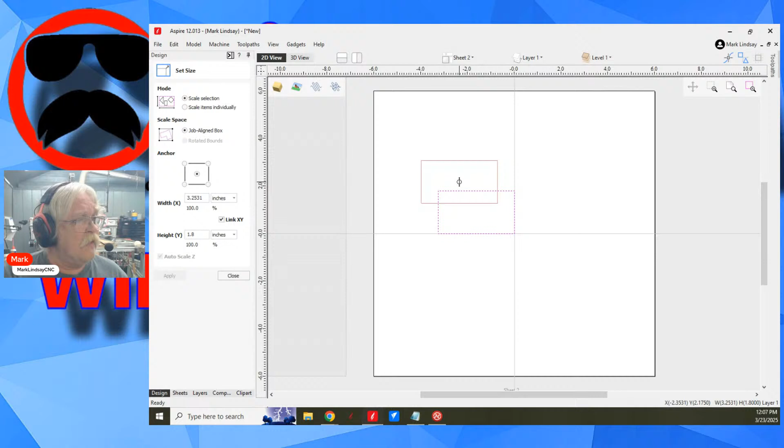In talking about set selected object size, let me bring this up here a little bit. When talking about the anchor point, the point that I was trying to make and just didn't spit it out and use these words was the fact that when you anchor from the center, your center point stays put. It doesn't move. So for instance, let me get rid of this here, and we'll create a bunch of half-inch circles. All right. And we got boom, boom, boom, boom, boom.

This is a pattern that you have to keep. Your measurements from center to center here are correct. Your measurements center to center here are correct. You need these holes, these circles, to stay in this position. But you need to make them smaller or larger for some reason. Maybe these are holes to receive a dowel, and you set it up for half-inch dowel, and later on you need to change it for 3/8 inch dowel. But you need these to stay in this location.

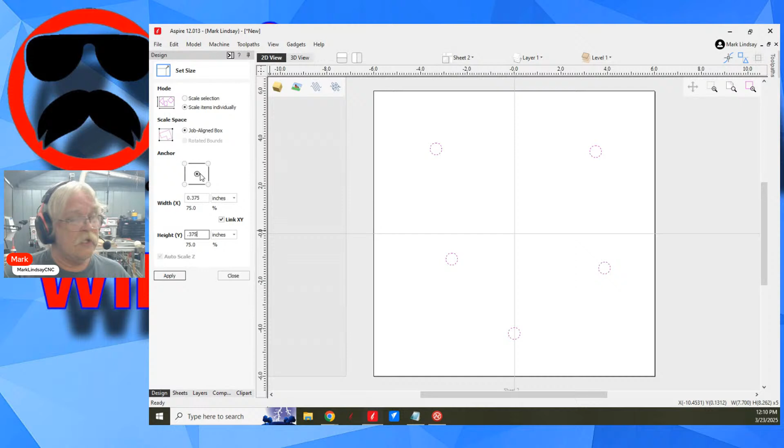For instance, I can change now my height in Y to 0.375, and my width in X changes. And because I have my anchor point set to the center, the location of these circles will not change, just the size. So I can click apply, and now I have the exact same pattern with the exact same locations, just a different size here.

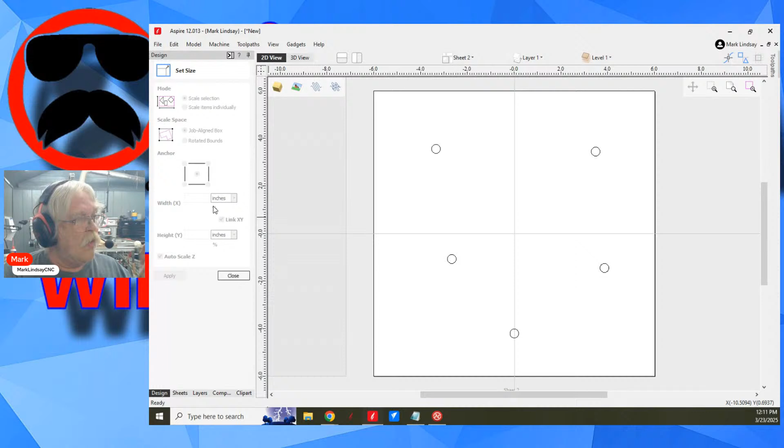This comes in real handy when you're working with some of these slot together puzzles where you have a tab that's going into, for instance, a 1/4 inch tall by 3/4 inch wide slot. And you go get some 1/8 inch plywood. You can now select all of those slots, and using set selected object size, you can anchor them in the center and change the height of those slots without changing their location. So I didn't mean to create a bunch of confusion in that.

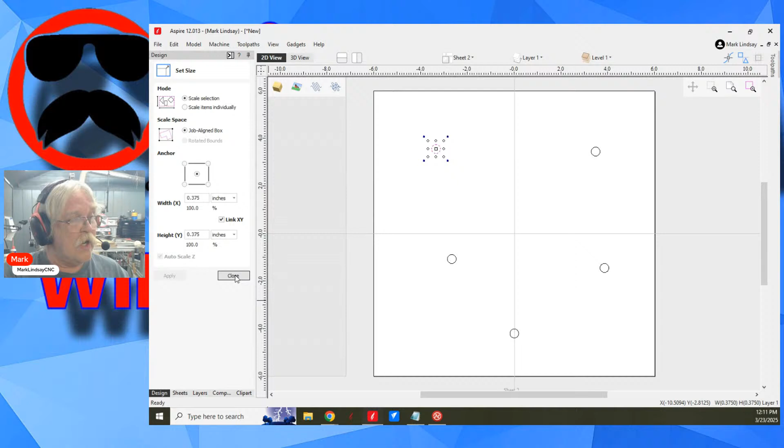Also, in set selected object size, we have down here the scale space. I was saving this for a future video. I could either go with a job aligned box or rotated bounds. I'm saving this explanation for a future video when we talk about rotating and mirroring vectors. Because if you look right now, I have all of these selected. Rotated bounds is grayed out. I can't even select that yet. I will get into this scale space when I get into rotating and mirroring vectors. Okay. That was an intentional oversight, let's just say.

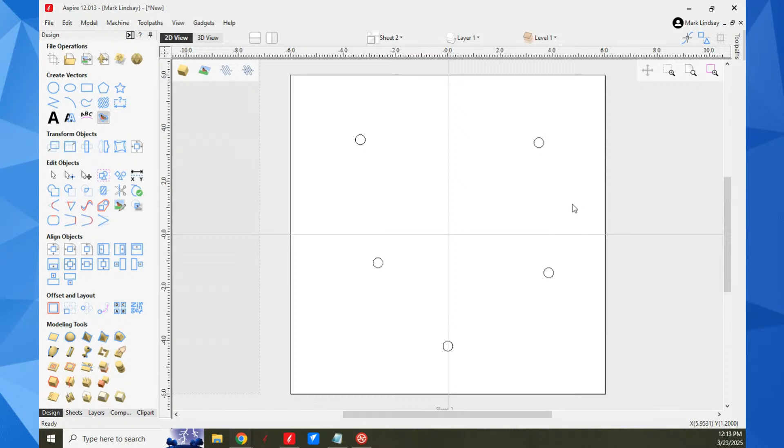There are a couple of things to look at here, Dion. Number one, let me go ahead and make this full screen, and I'll get rid of some other confusing things here. When you're doing your toolpath preview, if you go up here to toolpaths and come down here to preview simulation quality, normally I have mine set to standard out here when I'm broadcasting to you. That is simply because I've got a lot of stuff going on in the background here, and this uses so many resources that it can slow down everything. So I normally have this set on standard.

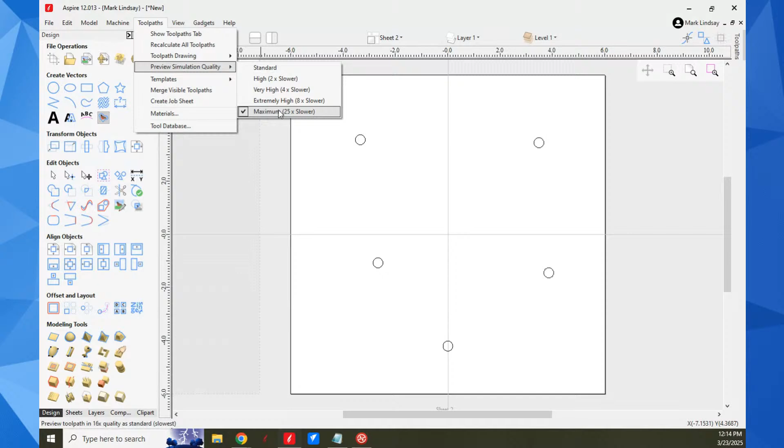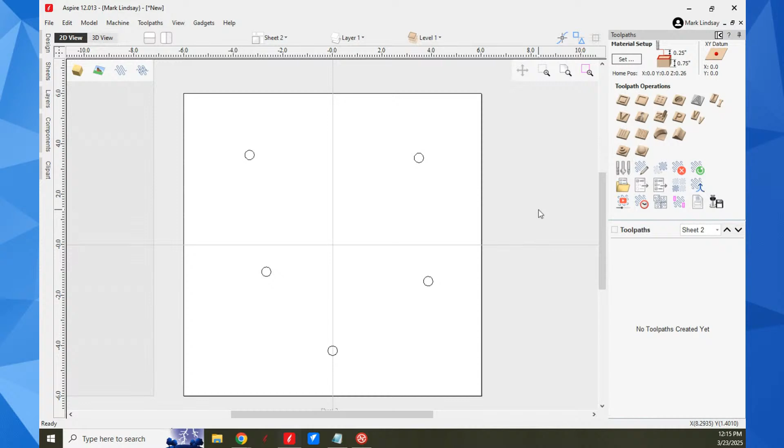But if you come down to preview simulation quality and set it, for instance, at the maximum, it will take longer to render and take longer for that preview to go through, but that will give you the highest quality of the previews. It is high resolution, but a lot of things also depend on your system.

If you have a robust video card in your system, that's going to help a lot because the GPU will process that faster. That GPU is dedicated to rendering that 3D preview. If you don't have a robust video card, get as much RAM in that computer as you can. What I'm getting at is it may be a limitation based on the resources that you have available in your computer.

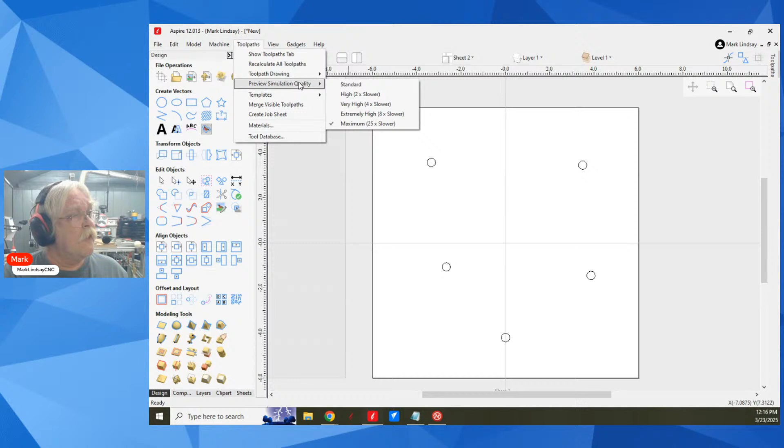So again, that is Toolpaths, preview simulation quality. Like I said, out here I normally use standard or high, but when I'm working in the house on something where I'm not using a lot of resources to broadcast and all this other good stuff, I will use the maximum, especially if I'm saving a preview image to send to a client or something like that.

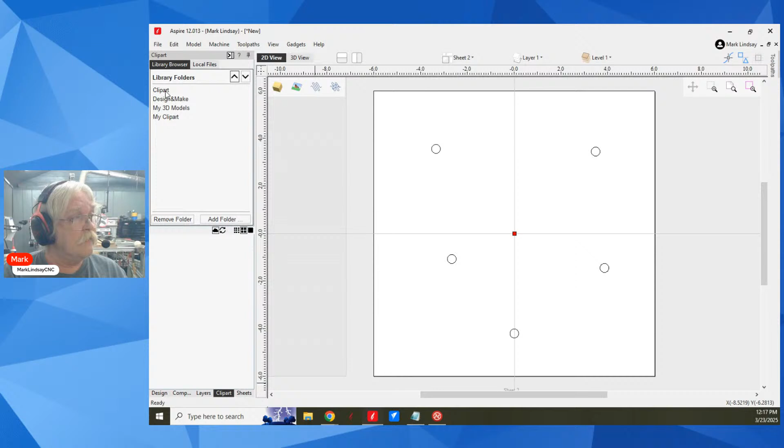Dion says, I was just setting job setup modeling resolution. Your method works much better. They work kind of hand in hand. But the difference is the modeling resolution over here in job setup has to do with how the 3D models are imported, if it's an STL file, for example, or rendered if you're using clip art. Let me go back over here to the design tab and go back into job setup. At standard resolution, it's kind of like a photo image, okay?

I've got a 12-inch wide, 12-inch tall piece of material here. At standard resolution, it's dividing this surface into 1 million points. But if I go to very high, it's dividing this up into 4 million points. So that right there is going to give you better detail and less blockiness on the actual model. And it does make a difference in the final product.

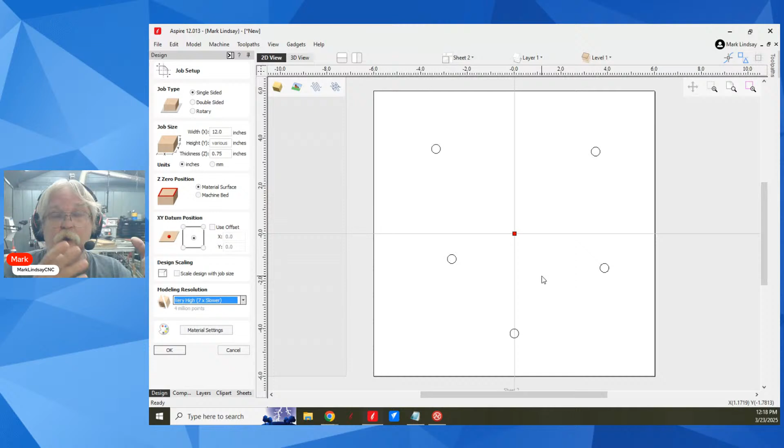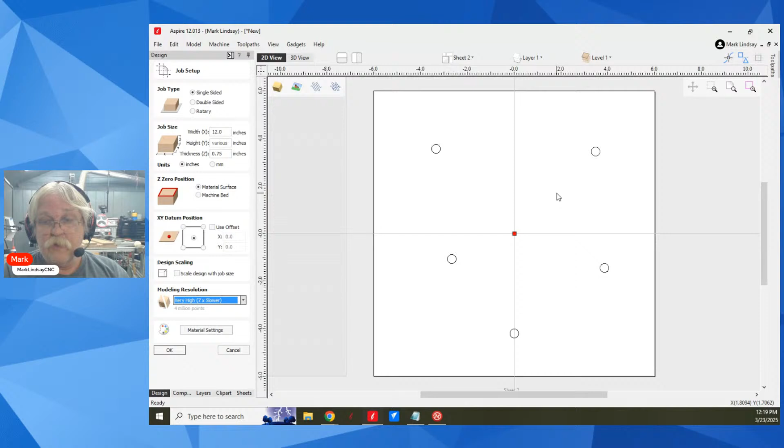That resolution does make a difference in the final product, because just like with a photo in imaging software, the more pixels you have for a size, the greater the detail. It's the same with this. Remember, the 3D models used in Vectric software are bitmap based. They use depth maps. So dividing that depth map of the 3D model, the smaller you can make those pixels, the more detail you're going to get. I hope that answers that, Dion.

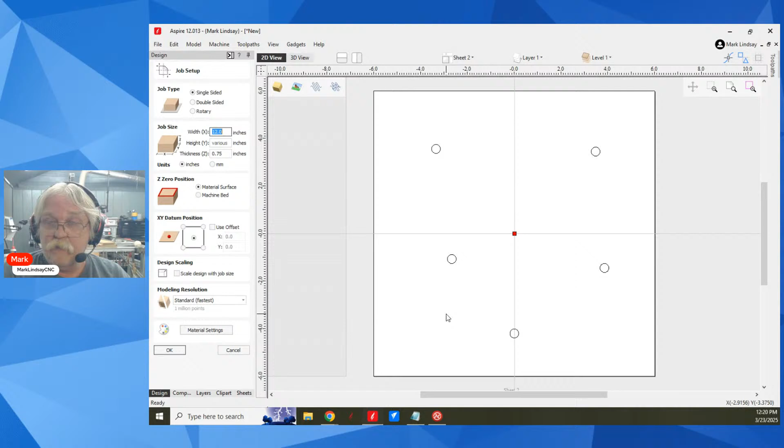Basically, Toolpaths, preview simulation quality. But again, they work hand in hand. If you import the 3D model at a low resolution, then try to capture a preview photo at high resolution, you're still going to have that low resolution model. And if you set this up at standard resolution and import a model, then come back and change the resolution, it will not change the resolution of that model. You'll have to get rid of it and re-import it at the higher resolution. Okay?

That model is going to stay at the resolution you set when you did your job setup. Now, you can set it up with standard resolution and then come back and change it later on to high resolution, as long as you do it before you import the first 3D content. Okay? So, I hope that helps.

All right, let's see here.

All right, let's get into another question here from David Zangmeister. David sent me an email about this, and I said, well, it's easier to talk about when I can show than it is to try to type out in text. So I told David I would talk about this, and thank you for joining us, David.

Is there a way to trick Vectric into cutting a groove in the side of a piece with an appropriate slot cutting bit? Yes, there is. But it's kind of sketchy. It's kind of dangerous, okay? Basically, what you'll want to do is, let me get set up over here, all right. Basically, what you'll want to do is, as you say, trick it into doing what you want to do.

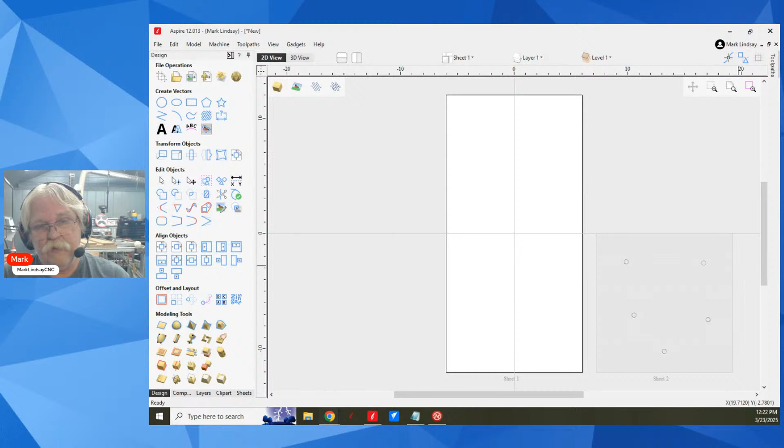So just straight up, don't try to use a bit with a guide bearing on it. You're asking for trouble. Now, most of these you can remove the guide bearing, but you're still going to have a little nub down there at the bottom that the guide bearing bolts to.

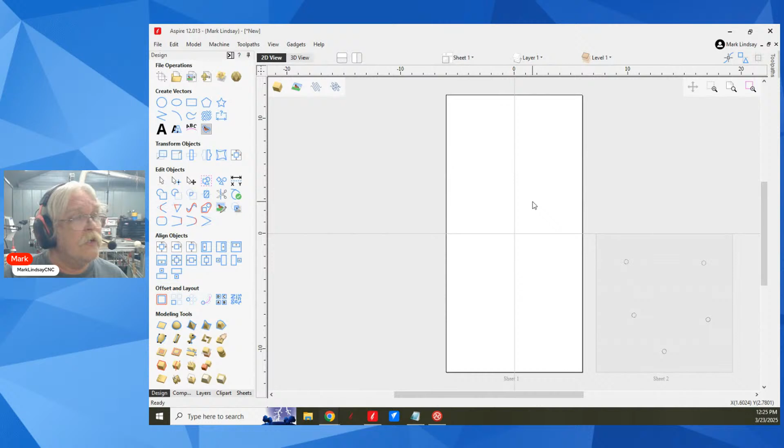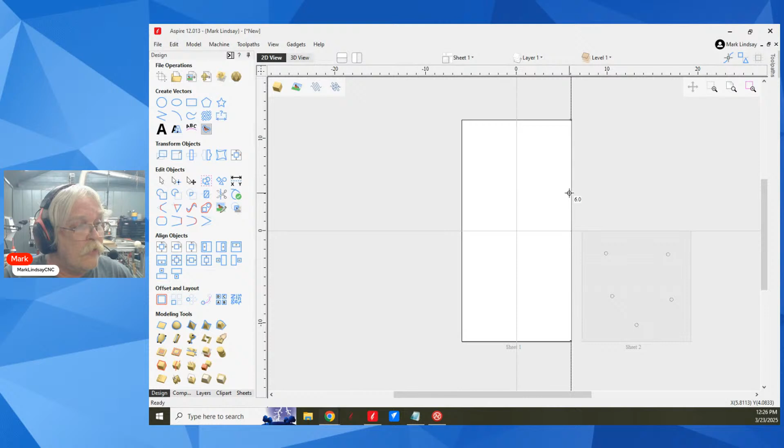What you're going to want to do is you need to draw a vector, obviously, for the bit to follow. So we also need to figure out where that vector is going to be placed. Now, this is kind of sort of cheating. I'm going to assume that this is the edge I want to put that vector on and that I want to cut.

Yeah, and I don't have a DXF viewer on this computer. This computer I have limited programs on because I don't use it for much out here.

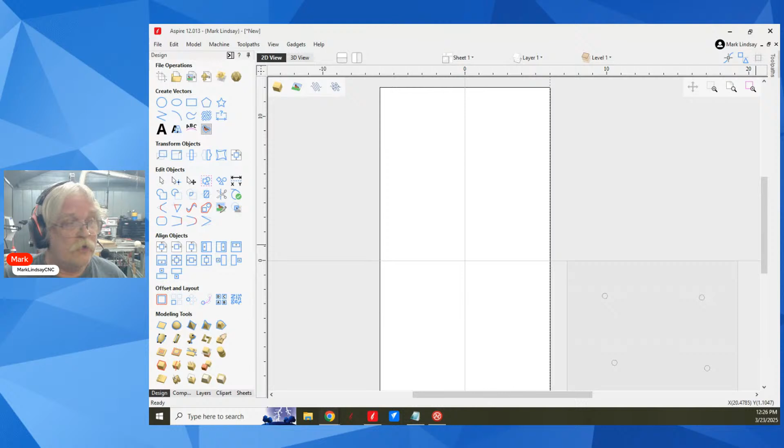So there's the edge that I want to cut the slot into. And I'm going to go 1/4 of an inch deep. I want that slot to be 1/4 of an inch in to the edge of the material. So I'm going to say minus 0.25 equals, and move that guide inward 1/4 of an inch. I'll close it. This is where I'm going to draw my vector.

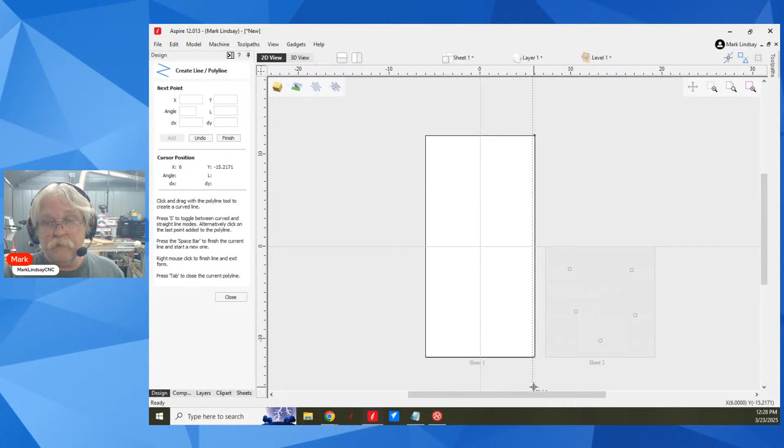So looking at that bit, I can see that the diameter is 1 1/8 inches. I'm going to double that because I want the bit to come down out here and out here. I want that bit to Z plunge off of the material, then come in, enter the material at the correct depth, come down here and cut all the way through and come out, then retract. Okay?

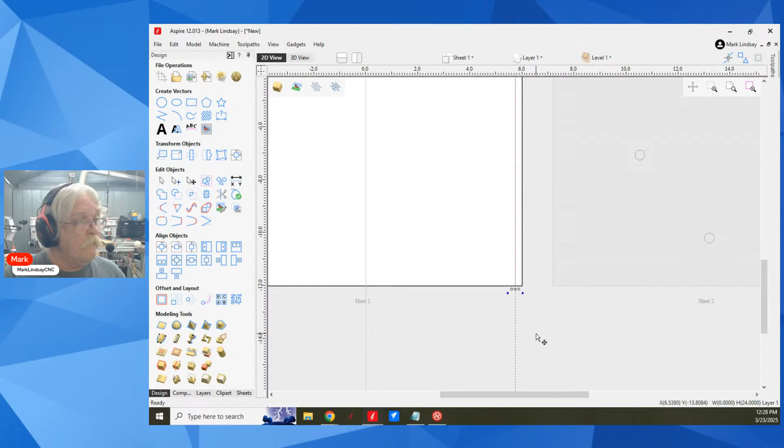So what I'm going to do is, I'm going to start about here. I'll just draw my vector here, then come down and shaboom. Close. Click off. Now I'm going to delete that guide.

Now, bet you didn't know it was going to dovetail in with what I showed yesterday. I'm going to scale this vector up. So I've got it selected. Come over to set selected object size. I'm going to scale the selection.

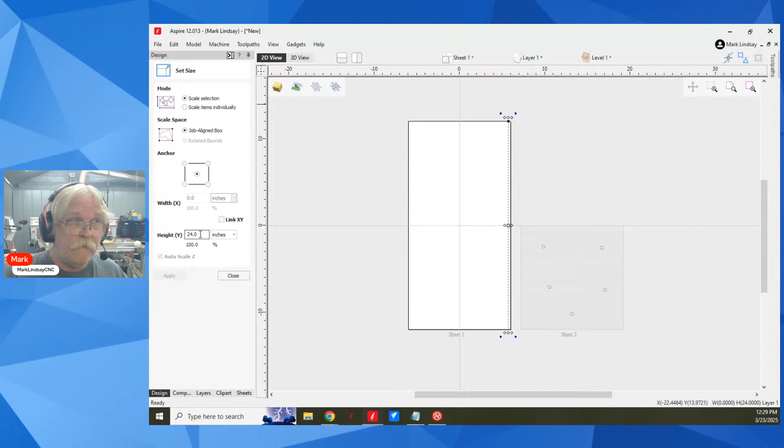I'm going to unlink the XY. My height is 24 inches. The bit is 1 1/8. Doubling that, it's 2 1/4. So I'm going to add 2 1/4 to this. Then I'm going to add another 1/2 inch. That way it misses this material by 1/4 of an inch in both directions.

So I want to add 2 3/4. So I'll just go plus 2.75 equals. So that's going to be the height in Y. I'm anchoring from the center. Click apply. And now my vector is...

Let's get a dimension here. Hello. Let's get a dimension here. See, this is what I mean. It's really slowing down my system because I have that rendering so high. Well, that's part of the reason. Come on, you can do it. I've got so many things going on this computer.

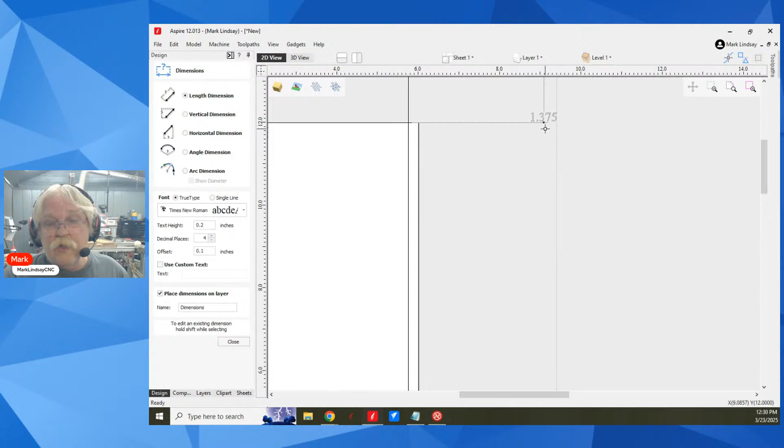There we go. I want a length dimension from here to here. I can pull that out 1 3/8 inches. So this bit is going to clear when it plunges down to my cut depth. It's going to do it out here. Okay. Well, I no longer need that dimension. We waited all day for me to do that.

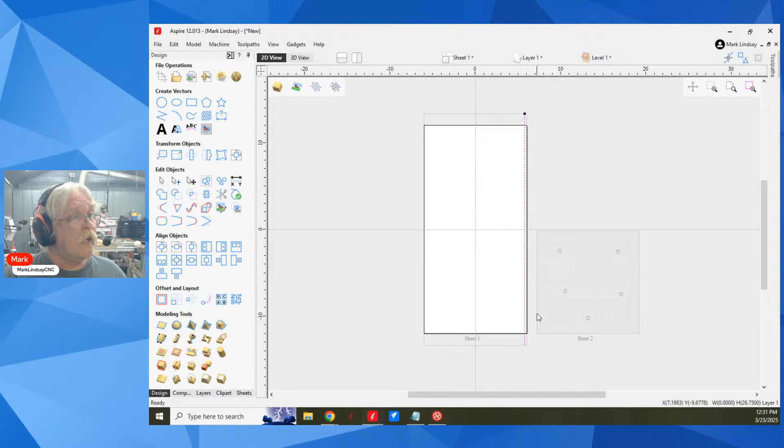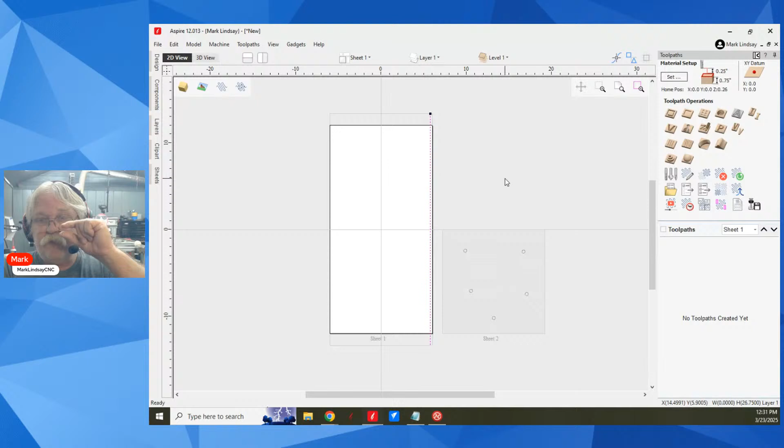All right. So now I can select that vector. I can come over here. Here's where it gets a little tricky. That bit is 5/16. That's the cutting height, 5/16 of an inch. Half of that is 5/32 of an inch. Sorry, metric folks, we're working in fractions.

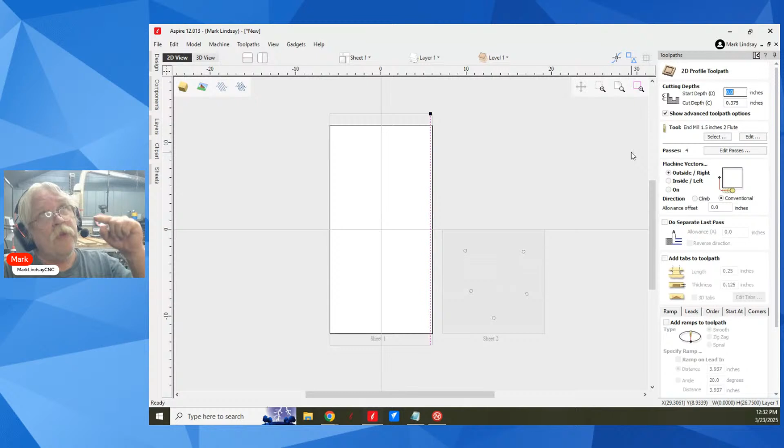We need to put the center of that bit in the center of this board. That's going to require a little bit of math. And they said there'd be no math. So what I'm going to do is I'm going to use a profile toolpath. So I want the bottom of that bit to be 5/32 below the center of my board.

Now my board is 3/4 of an inch thick. Half of that is 3/8 of an inch. I have to add 5/32 to that to get my cut depth. Okay. But it's not going to be my cut depth. It's going to be my start depth. My cut depth is going to be 0. My start depth is going to be, I don't know, the 5/32. I don't know what the heck that decimal equivalent is.

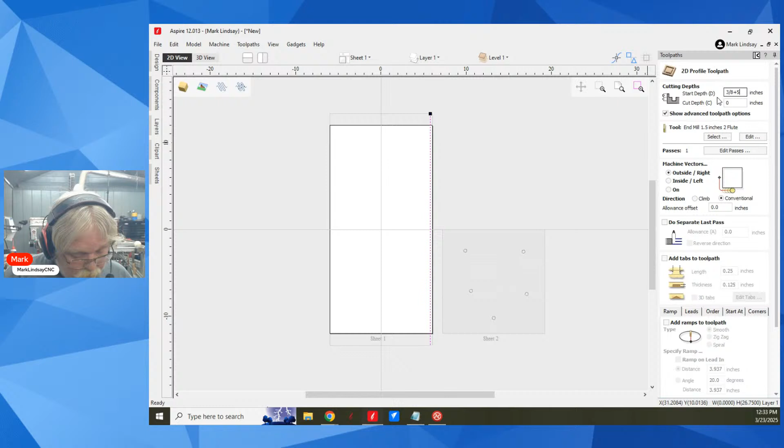But I do know 3/8 plus 5/32 equals, there's my start depth. That's my start depth. That's where the bottom edge of that bit is going to go. Okay.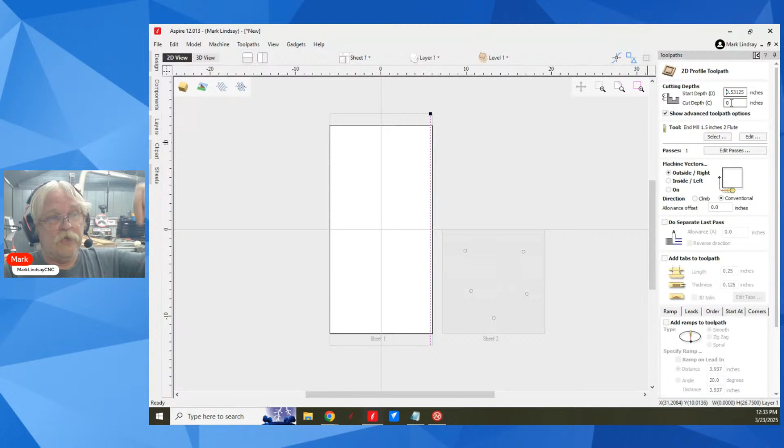Bear with me. I'm doing a cut depth of 0. Okay. It's going to plunge down to that depth and just move. It has to do it in a single pass. Now, here's where you may have a problem.

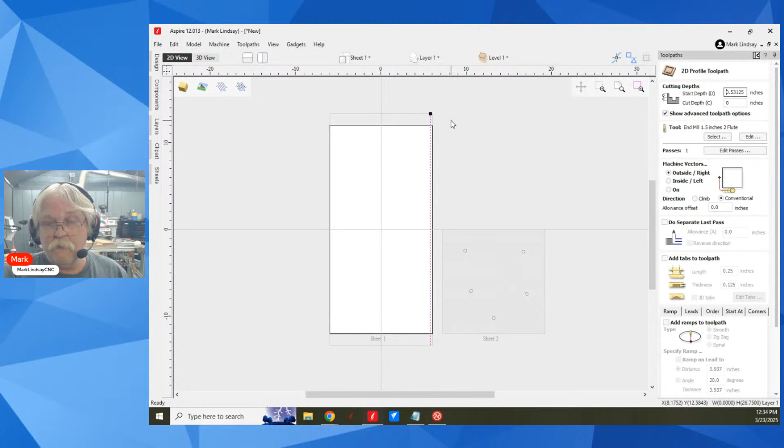If we look at this black dot, that tells me that's the start point. It's going to come up here and it's going to plunge. I want to machine to the inside of that vector. Again, when figuring out whether you're going to go outside to the right or inside to the left, imagine standing on that start point and looking in the direction of travel.

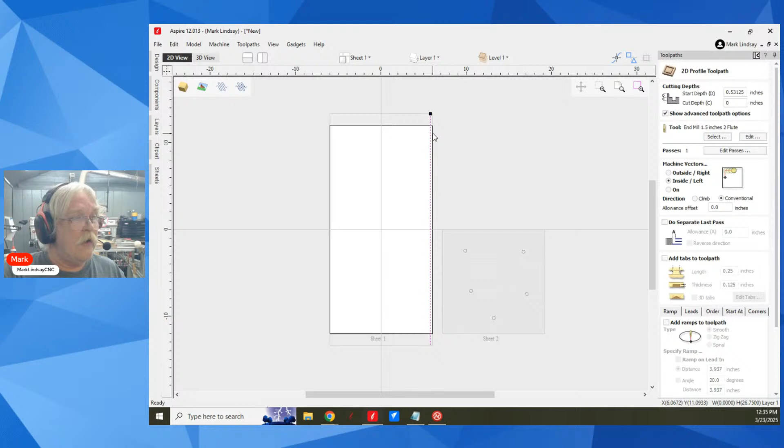If I go outside to the right, it's going to cut in. If I go inside to the left, the edge of that bit's going to follow that vector right there. Okay? And we're going to do this all in one pass. We're going to calculate it. Now, unfortunately, Vectric software will not calculate anything that gives us an undercut. So what it's going to look like is a rabbet cut into this material.

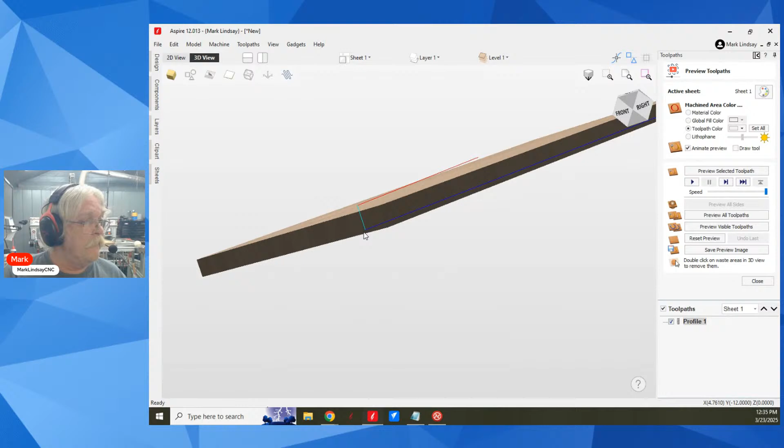But if we look at our toolpath, we see what it's doing. We've got a plunge here to the cutting depth. It's going to move this way, come out here, then lift up and go back to the start point. Take that back. It's switching up on me. It's going to come down here and then cut that way.

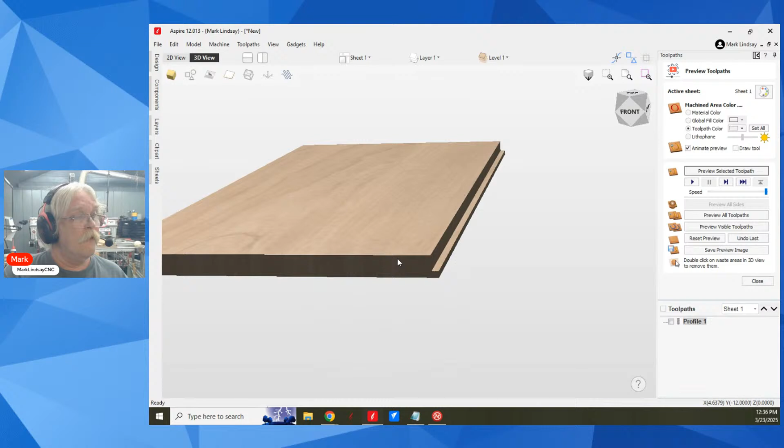This is why previews are really, really, really important. Now, again, it's just going to look like a 1/4 inch rabbet because it will not show an undercut. But that shows you what you're looking at. That's what your preview is going to look like. Okay?

It will not show this undercut, and there's nothing you can do to change that. Again, you have to kind of trick it into doing what you want it to do. And it's the same thing with the keyhole slot. I will try to go into that later.

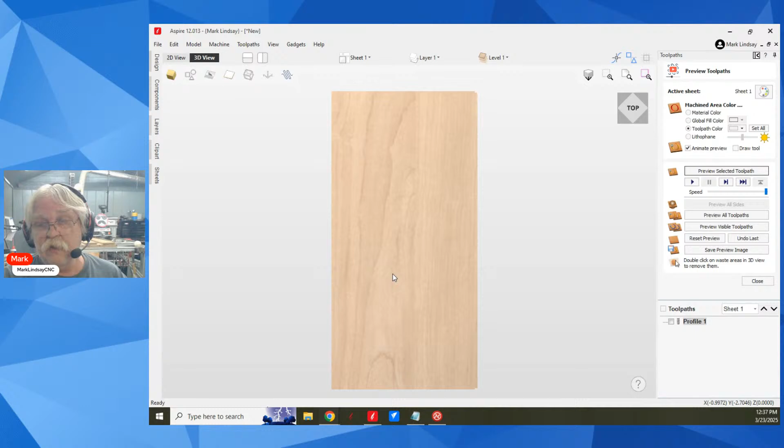We've got some other questions I want to get into, but cutting a keyhole is very, very similar. And in fact, that bit that you're using, David, is very similar to a keyhole bit. You've got to be mindful of the cutting height of your cutter and that blade along the shank as well, because it has a depth of cut as well.

simply because it's going to plunge in, move about maybe an inch. I think the longest keyhole I've ever cut has been a horizontal keyhole that was 2 inches. So it doesn't have to go fast. And in fact, it's better if it doesn't go fast.

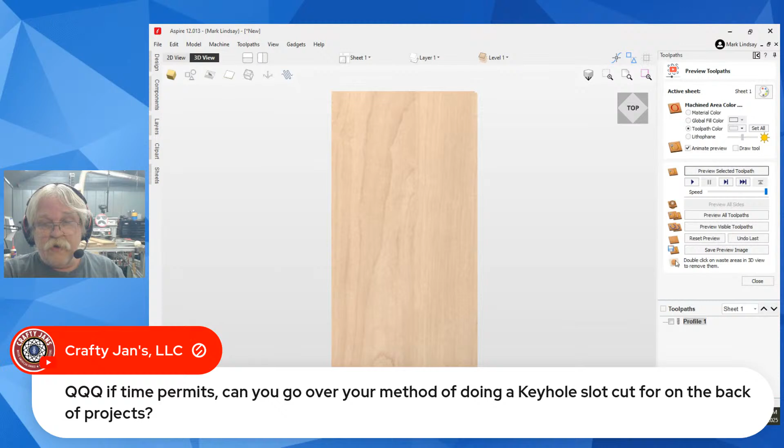All right. Jan was asking, can you go over your method of doing a keyhole slot cut for the back of projects? Very simple. I'll go ahead and do one here. Go back into the 2D view. What I do is I draw a rectangle, let's say right here. Oh, it's got that selected. That's why. I want to draw a rectangle, let's say right here. Okay.

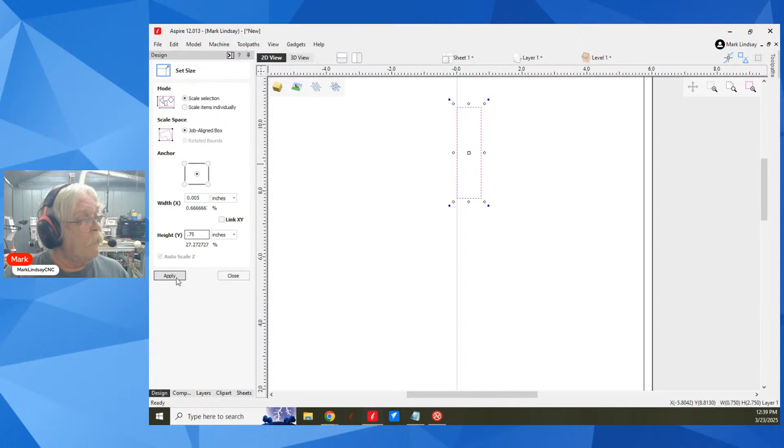Close. Now, this rectangle, I want it to be unlink XY. I want the rectangle to be 0.005. Whoops, more than one decimal. Software doesn't like that. And I want it to be 0.75. Very tiny. Apply. Close. Now I want to put that in the center of my material in X, so it's right on my 0 line.

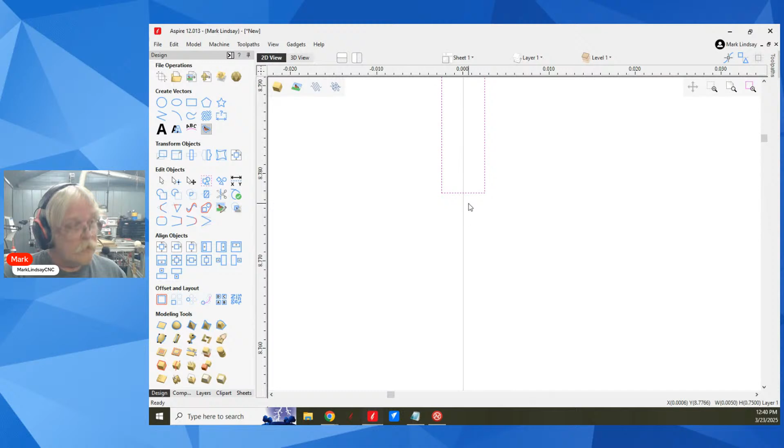Now I'm going to zoom in on this. With it selected, I'll go into node edit mode and I'm going to delete that span, so I have a horseshoe. Okay. Now I've got an open vector. That's what I'm going to use for my keyhole bit. I'm going to close that, do a profile. I'm going to select the bit. Going to use my keyhole bit.

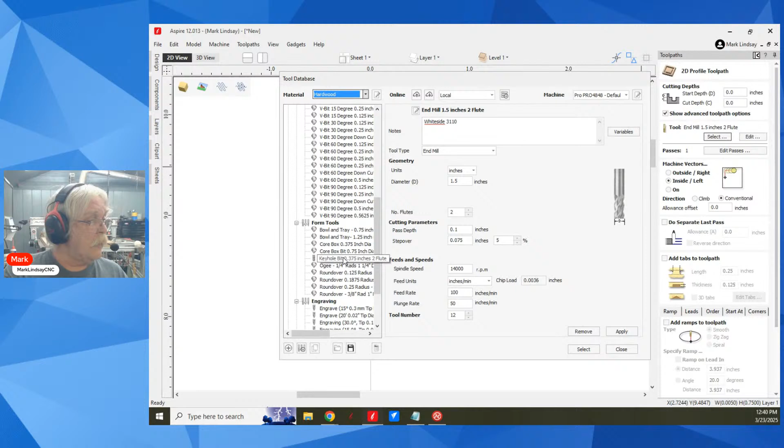And I'm going to look at that pass depth because that's what I'm going to use as a depth of cut. Okay. 0.3438. Select. 0.3438. And this is dependent on the bit you have. Every bit's going to be different. Okay. One pass, and I'm going to cut on the vector.

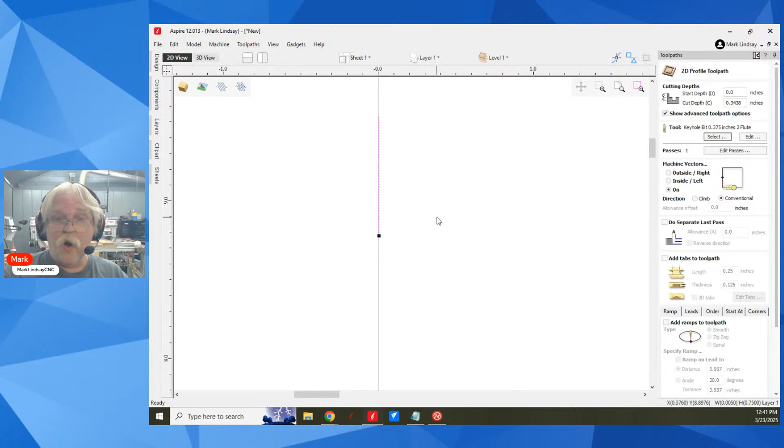So that keyhole bit's going to plunge right here to full depth. It's going to move up, come over 5/1000ths of an inch, come right back down here, then lift up out of that hole. It's going to be off by about 5/1000ths, but it will cut its way out. Okay. And of course, that's the only thing I'm going to do with it.

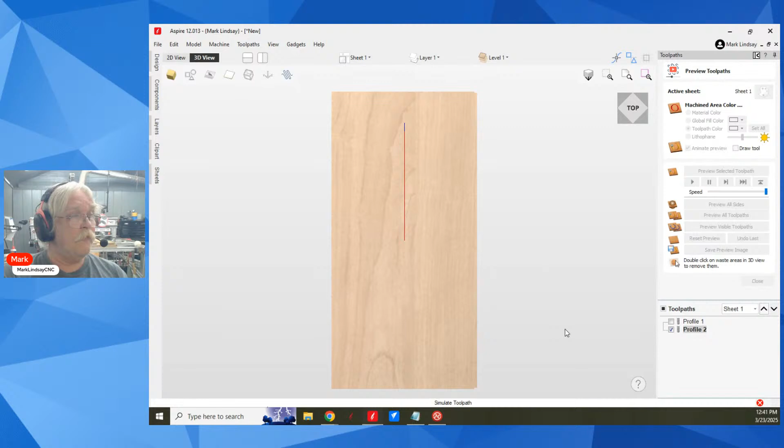And of course, it will not preview an undercut, which is what that keyhole bit creates. So when I preview it, it's just going to look like a slot, but that is actually going to be a keyhole. So that's how I do the keyholes, Kurt. And again, it's totally dependent on which keyhole bit you have. So you've got to measure everything and take all of that into account.

Now, and typically, yes, typically at a lower speed. And that's simply because of the depth of cut. You don't want to stress that bit, because you can really damage either the project or the machine if you get this wrong.

So now Michael Ludwig says the keyhole gadget works very well also. I've never used the keyhole gadget. Do you ever have problems with chips using the keyhole bit? No, but I have good dust collection. So generally speaking, the chips are gone by the time it comes back. But that's why I have it do that little horseshoe shape. It's only 5/1000ths wide.

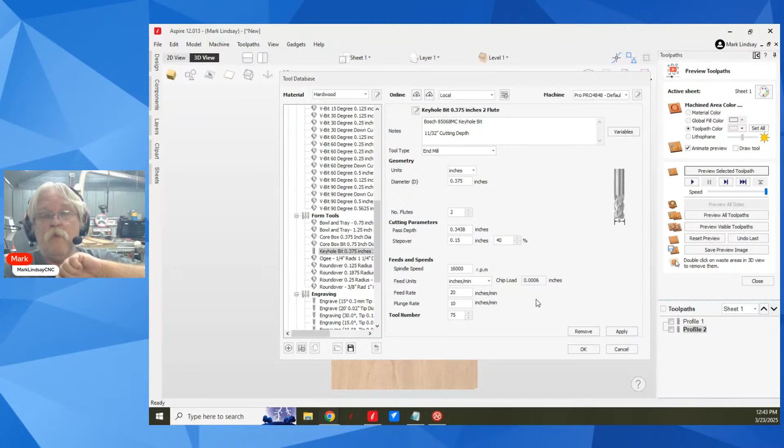And you can reduce that if you want to make it 2/1000ths or 3/1000ths or what have you, but 5/1000ths works for me. And it's just moving over just slightly. So what you've got to get that bit to do, it's got to plunge in, move up, and then come back. If you try to overlap two vectors, it's going to try to lift up before coming out, and you don't want it to try to lift up out of that keyhole.

So it's got to plunge in, move up, move over just slightly, and then cut its way back, then lift out at the same point that it plunged in. And that's the whole point of doing that very slight U. It'll cut its way there and back and not try to force its way out.

And your first pass is at full bit width and depth. Yes. And that's why I run it slow, is give it time to cut instead of trying to force it.

The gadget just needs a hole drawn and does everything itself. What I did with this, and this is the only G code I saved, I created a vertical 1-inch tall keyhole and a horizontal 1.5 inch wide keyhole, and set my XY 0 to the center. I save those 2 pieces of G code. Then the next time I need to make a keyhole, I mark on the material where I want that keyhole to be, and then I set my XY 0 at that point, run the keyhole, and I'm done. But I can load either one of those G codes and just run it.

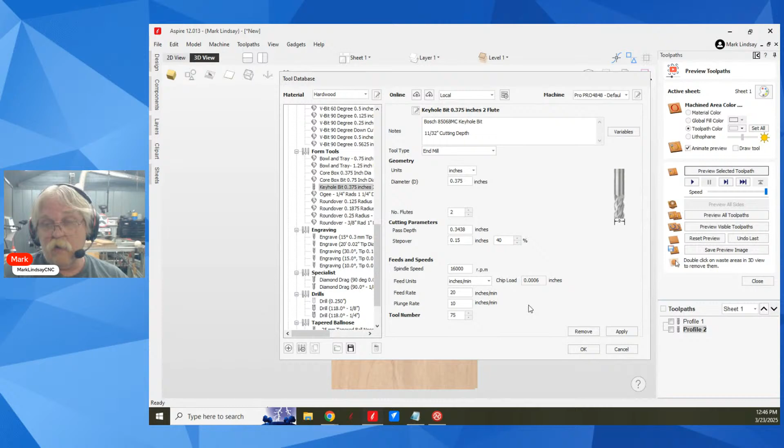I made a video on how to enter a keyhole bit and how to use the keyhole bit in, I want to say it was VCarve. I don't think I had Aspire yet. And I will link that video down in the description of this live stream as soon as we're finished here. Just wrote myself a note. I want to say it was part 12 of my original Absolute Beginner series. And if that's the case, I'll go ahead and make it part 12 of the 12 plus Absolute Beginner series. I'll redo that bit. So let's see here.

As far as the gadget is concerned, Michael, the main reason I didn't use the gadget was because I was VCarve desktop and Cut 2D desktop. They don't have gadget support. They can't use gadgets. So I was trying to come up with a way all users could make a keyhole without relying on gadgets.

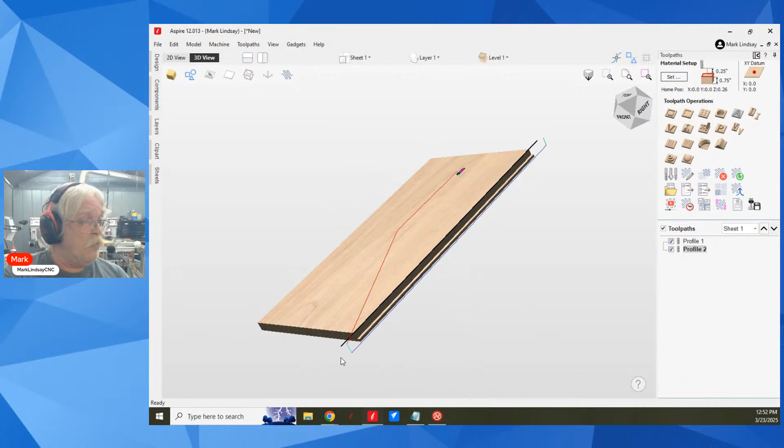So will a bit not run along back and forth on a single line? No, and that's the problem, Alan. It will want to plunge in just like this over here. This is a single line. It will want to plunge in, move down the length of that line, then come out and go back to XY0. It will not come back on that line. So that's why you trick the system. You trick it into doing that.

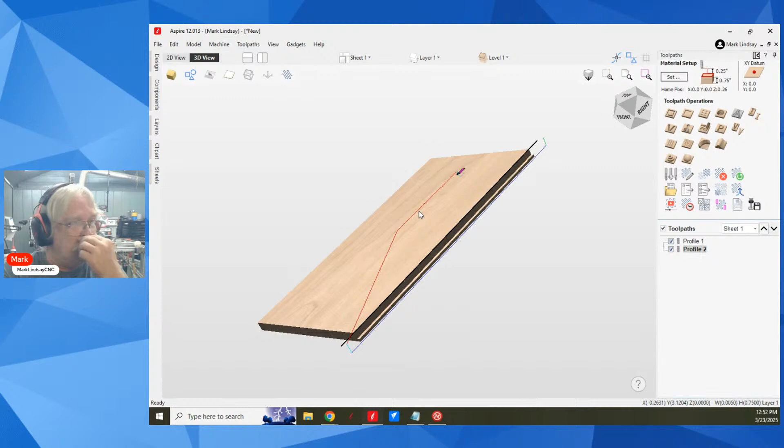Just make it a little horseshoe, so it'll follow that entire horseshoe. And that's why that horseshoe is so narrow. I mean, in this example, this is 5/1000ths of an inch wide.

That is, let's figure it out - that is 0.127 millimeters. That's an eighth of a millimeter. So that's a tiny, tiny horseshoe.

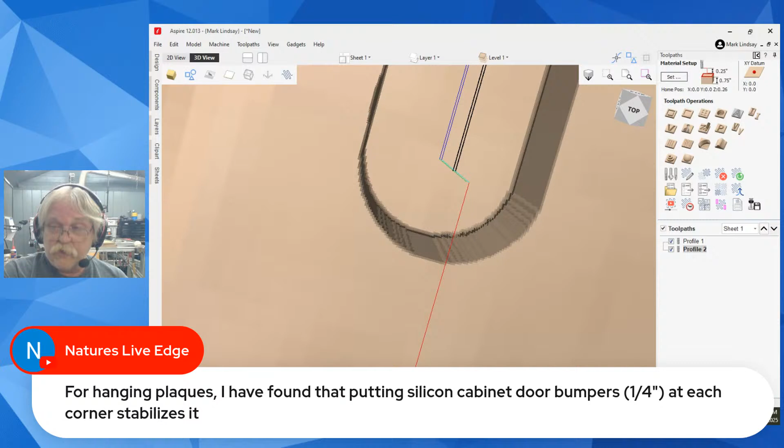For hanging plaques, I have found that putting silicone cabinet door bumpers, 1/4 inch diameter, at each corner helps stabilize it. Felt pads as well - little silicone ones or the little felt ones, they both help a lot. I've seen people even cover the entire back of a plaque with felt for much the same reason. That gives more grip, especially on a textured wall.

So let's get into some of these other questions here. Alan Williamson says, I need to start learning about 3D. Do you have a series for 3D for beginners? Yes, thank you for asking.

However, it's the older versions - all of the methods are the same, but the interfaces have changed. That's going to be next on my list, to do 3D for absolute beginners in version 12. But the methods are the same. I'll link it - actually, there was already a link. You should see a link to 3D for the Absolute Beginner already down in the description. You'll have to scroll down a little bit, but it should be there. If it isn't, I will put it there - the 3D playlist. But I believe it's there already.

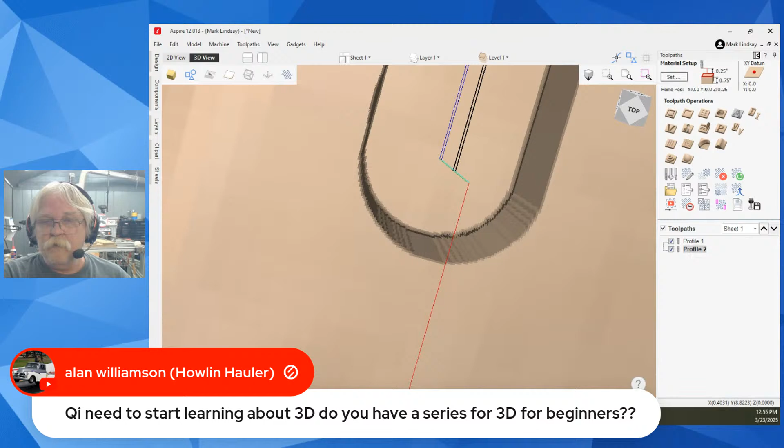So let's see here. Rich Bratcher wants to know, what was the worst thing that happened when upgrading to version 12?

Just not being used to the interface - that was the worst thing. Because you got to remember, for instance, this wasn't here in version 11.5 and earlier. Wasn't here at all. Everything looked different, the colors were different. Everything was different, completely different.

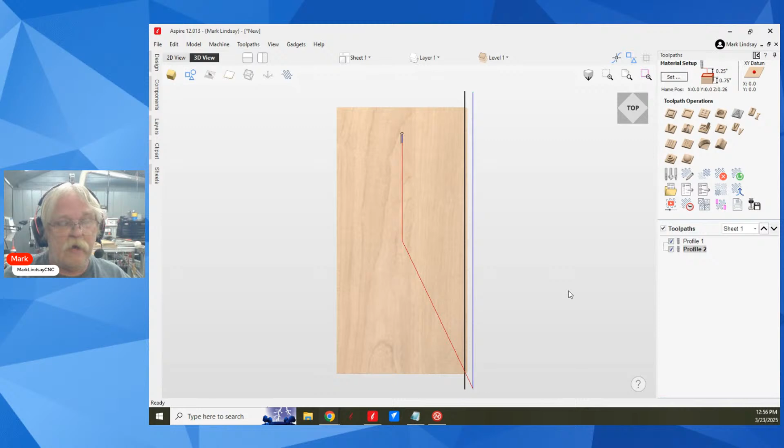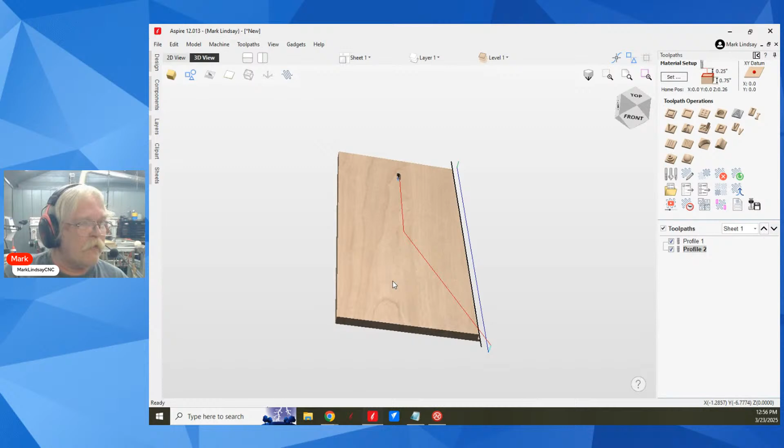The one thing that really bugged me, and it still catches me all the time, is in the 3D view, whether you're previewing or not, they went from left clicking to move this around to right clicking. And I still want to left click and move this, so you see me drawing squares. I still want to left click to wiggle this around, and that's not how you do it.

But I have heard from folks, especially those who are colorblind, that they have a real hard time with this layout, with the colors and the sizes of some of these icons. They really tried to put drawing and modeling on the same page, on the same tab rather. I prefer having a separate modeling tab with all my modeling tools over there.

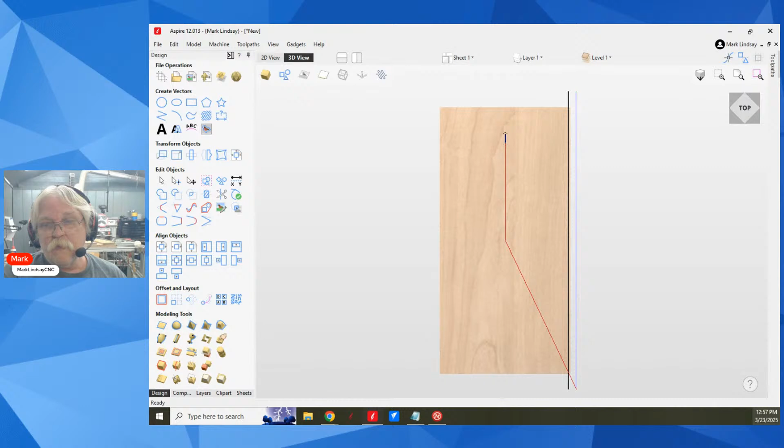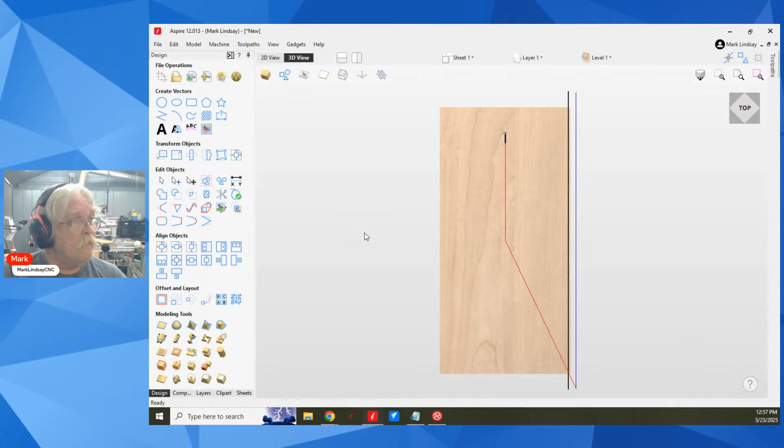So, I guess that was probably it. Everything else I more or less liked. It took some getting used to - it took some getting used to learn that I could draw in the 3D view. That was new and cool. But I picked up on it pretty well.

If I had to pick it, I'd say the worst thing about it was switching from left click to right click to move around my 3D view. Other than that, people ask me all the time, do you think it's worth the upgrade? Yeah, it's worth the upgrade. I didn't think it would be, but I enjoyed it. I do enjoy it.

Now, we were talking about this before we went live. If I go back to do something in 11.5, if somebody who doesn't have version 12 sends me a file and I have to look at it, maybe do a little modification, and I want to send that back to them, I have to do it in 11.5. I get lost in 11.5. I don't remember where things are. I don't remember the icons because I've gotten so used to these.

Let's see here. Any issues with the tool database coming over? No, because when you... let's see, I think it's up here. Tool data, no, wasn't this. Where was it?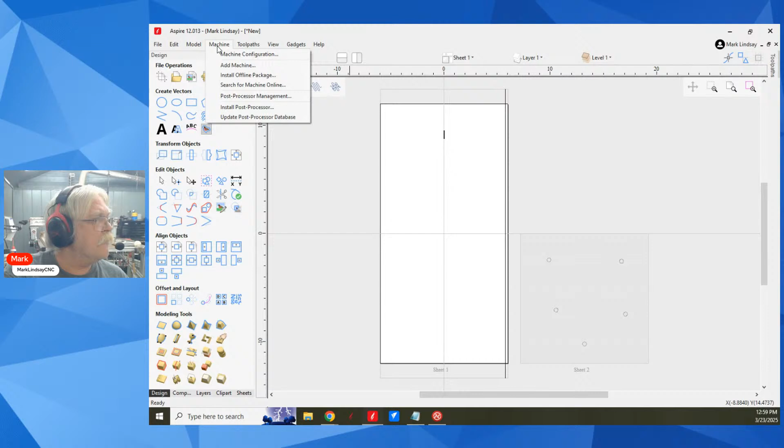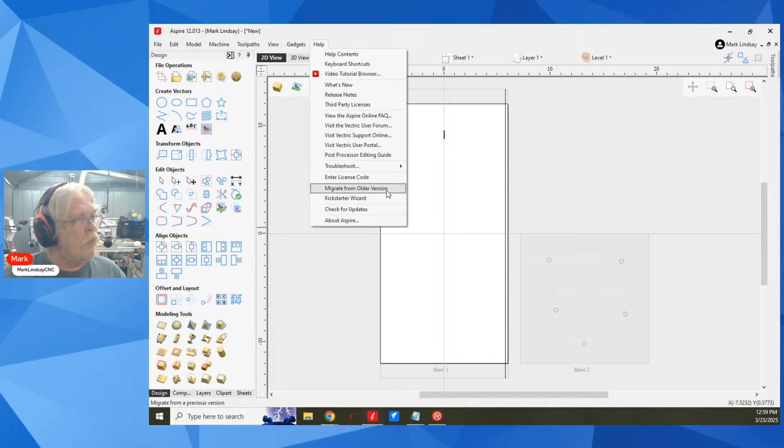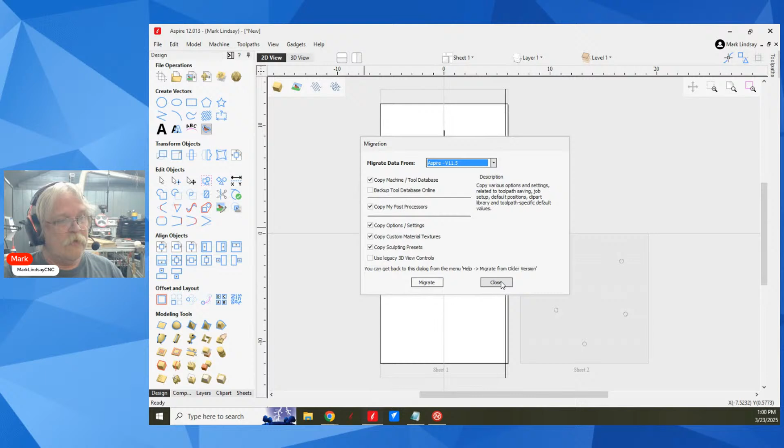There is a way to merge or migrate from a previous edition. Maybe it's over here. Migrate from an older version. Just migrate. When you go into here, you can migrate data from version 11.5, and here's where you get copy the machine and tool database, back it up online, copy the post processors, all of that stuff, and it'll take all of the settings from, in this case 11.5, and bring it over here so you virtually have the same setup. Normally when you install a new version it will immediately send you into that. Sometimes it doesn't. But if you go up to... where did I find that? Under help, migrate from older version. And that really helps eliminate a lot of those problems.

Okay, let's see, we've got a couple more questions here. I hope that answered that, Rich.

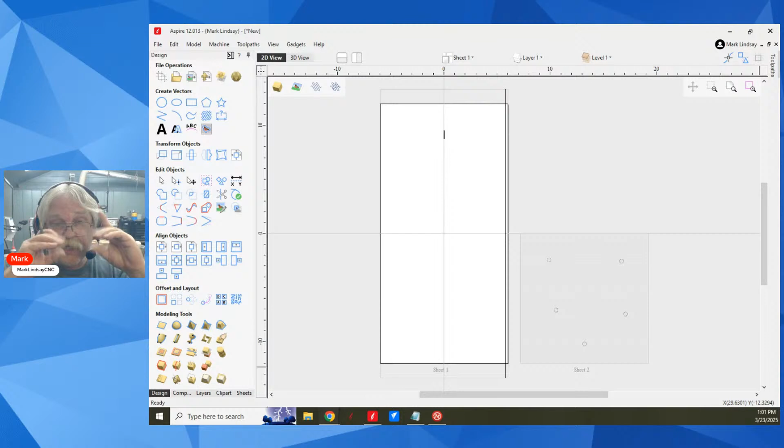Sam Spade says a project was designed with 6mm plywood. How do you change your project when your material is 4.5? There are tabs and notches that need to be changed. What I'm going to do, Sam, is go find a Vectric video where they explained it—it was Becky that did the video. They explained the ability to adjust and rescale sizes individually, and she did that exact example. She resized the slots as well as the tabs to fit those slots. She did both, just like you're asking. So I'm going to defer to her video.

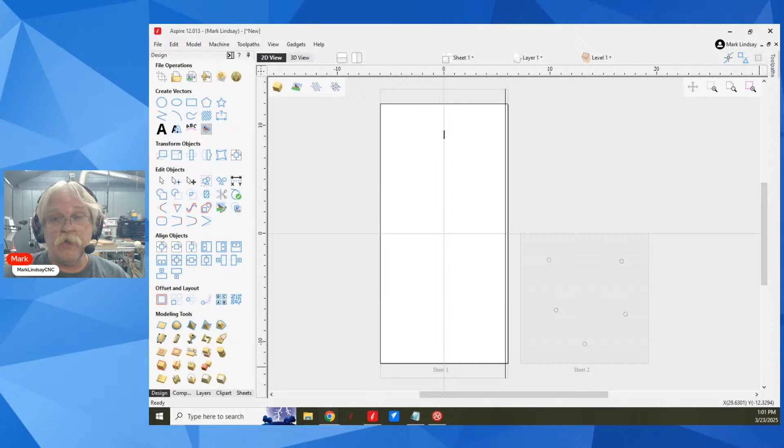Tab and slot. So I will find that video and link it in the description here just as soon as we're finished, okay? That's simply because there are several steps involved and I don't right off the top of my head recall all of them. But it was fairly simple to do. One word of advice, if you do that, after you've done the conversion, save as and give it a slightly different name. That way you have both, one with 6mm, one with 4.5mm, so you're not eliminating one or the other. But I will go find it. I don't remember the title of it, but I'll go find it and link it in the description as soon as we're finished here. Give me about 15 minutes after we're done live here.

So, let's see, John Thompson says, can you show how to make a fillet inward? Okay, let me see if I've got this correct.

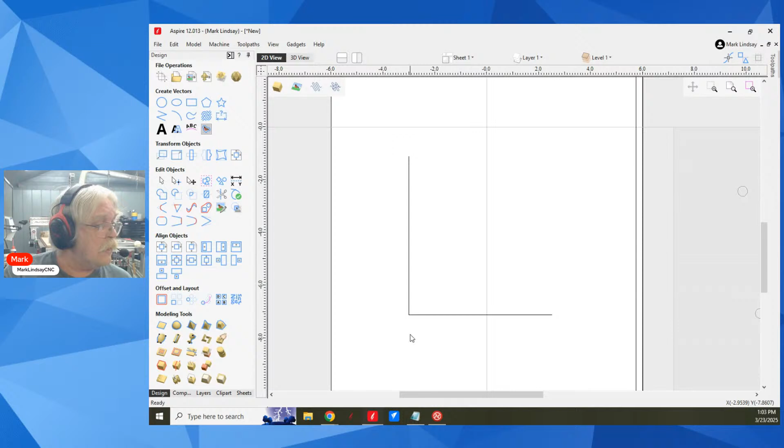I'll go over here and draw a line, click, and a line, click. And we'll accept that line. A fillet... let's see, a fillet inward. Are you talking about a fillet in this corner for clearance? Or is that what you're referring to, John? Because a standard normal fillet would just round off that corner to whatever diameter.

Wow, that was a tiny radius. Let's go with 0.25, just to demonstrate. Shebang. Is that what you mean? Like for a sign on the corners? You mean like that, just a normal fillet? That's what that is. I thought you meant like a relief fillet where...

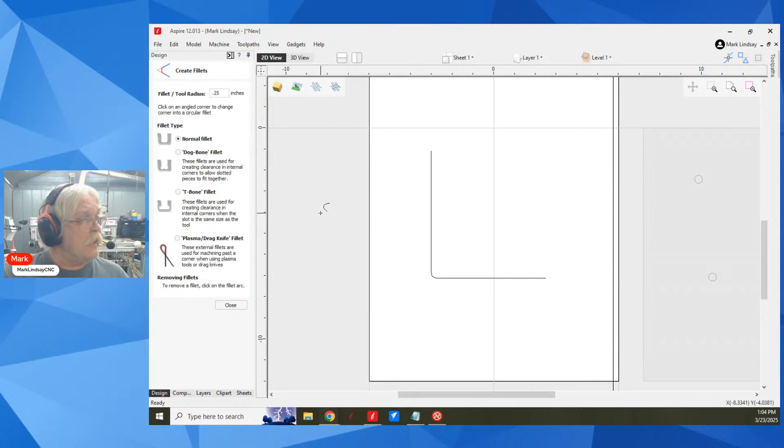Let's see here, get down here and we'll control-Z that. Dog bone. Boom, like that. So you can put a piece of stock here and that corner is covered.

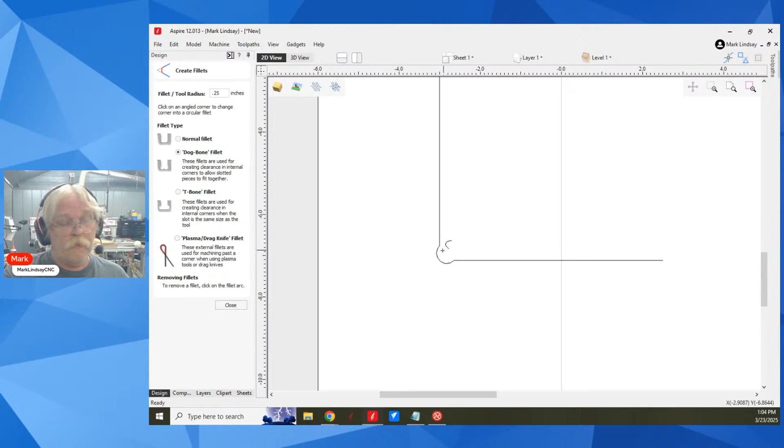No? Is that not what you're talking about? Oh, I think I know what you're talking about. Close. You're not talking about a fillet. I know what you're talking about now. That gets into when you create the rectangle. Okay, I want to create a rectangle like so.

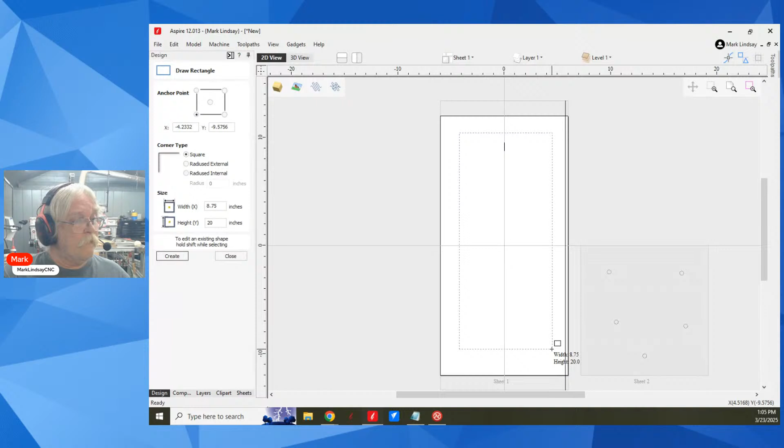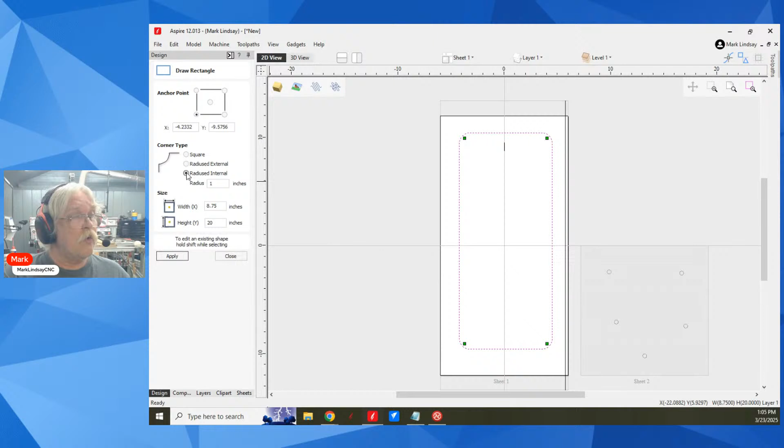All right, that comes down to corner type. Do you want radius external corners? Say 1 inch. Apply. Okay, we've got radius external corners. Or you can go radius internal corners. 1 inch. Apply. You mean like that? Is that what you're after, John? The internal radius is done when you draw that rectangle.

Now, here's another little thing. You notice I have these green corners here. I can change those internal corners by dragging. I push toward, they get smaller. I pull out, they get bigger. And look at my readout over here when I do that. It's changing the radius as well. So there's 1.5 inches. I can look back. Yeah, that'll work.

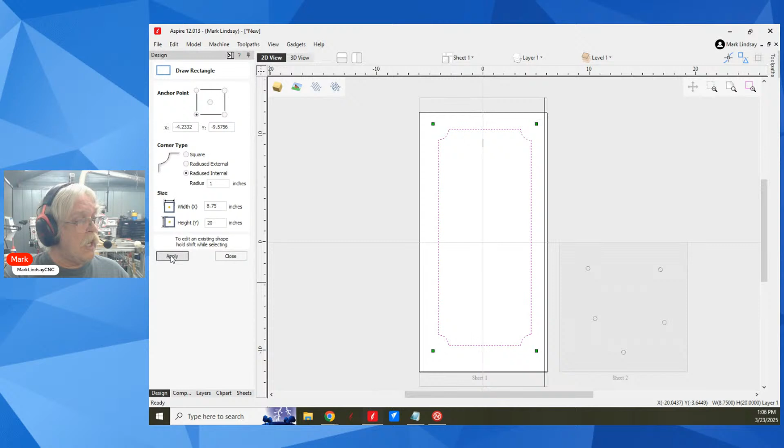Apply, close. Then later on, I can come back to it, go select it, go back into draw rectangle, and I can change it again. If I decide I want to bring that down to 1 inch, apply, close, and now I've got those. So it's not quite a fillet. It's just a radiused corner. And this is radiused, oops, no, wrong one. Radiused internal.

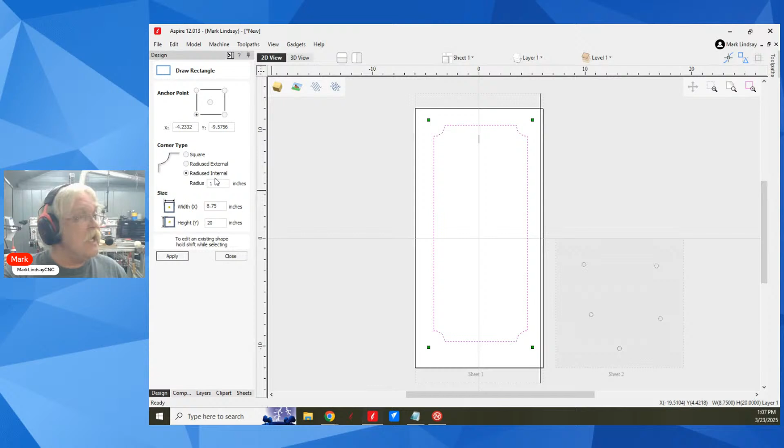So that's going to be in another absolute beginner video. In fact, I think I already did that. So I think I have everybody's questions covered. Did I not get somebody's question? If there's a question that you asked and I didn't get to it, please let me know.

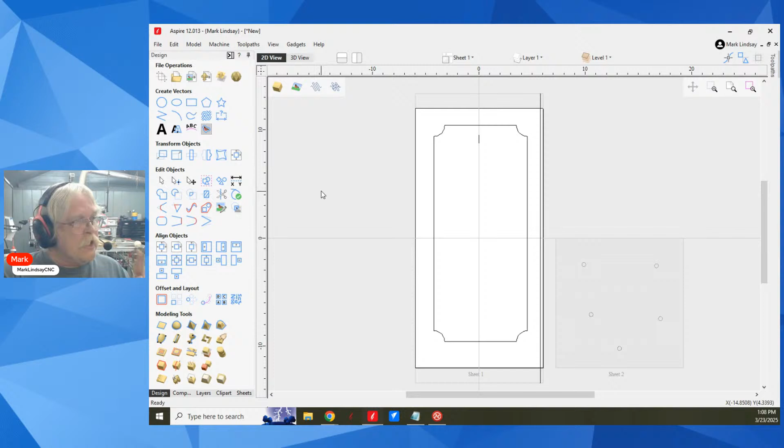But if not, I'm not sure that I'm going to have a video next week. I don't know. Part of me says go ahead and do the keyhole bit next. Another part of me says not to do the keyhole next, but instead get over here into rotating and mirroring, because those were the next under transform objects. I think, honestly, my next video is going to be on rotate and mirror, and I will get into the keyhole bit at another time.

The keyhole bit video that's already out there is still applicable. The colors of the interface are a little bit different. That's the only real difference, but I will do that. I'll do a mini series on the tool database, but I think the next one is going to be on rotate and mirror vectors. But I can't guarantee that'll be next week.

I think we'll go ahead and call this good. Go ahead and wrap this up. We got a nice day today. I've got to go get a haircut. Hopefully the barber's open today. Don't know. And we got to go do some grocery shopping. So I'm going to go ahead and wrap this up now.